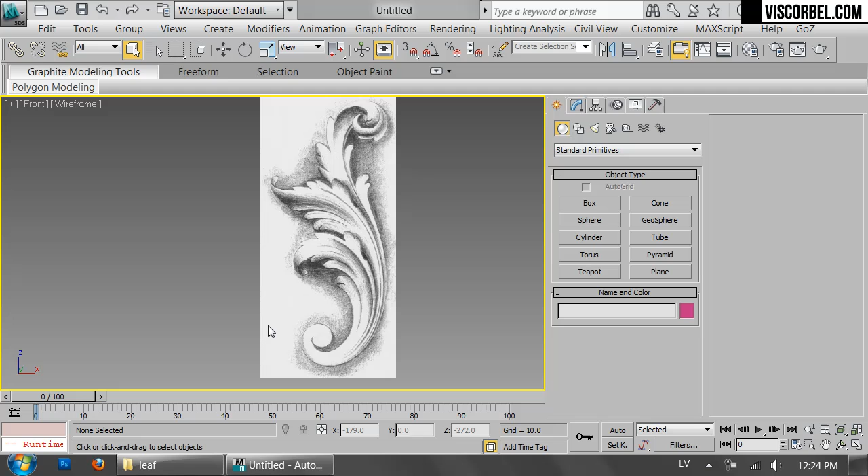Let's model some basic leaves. I'm gonna start with this little thing over here, just to show you the general idea.

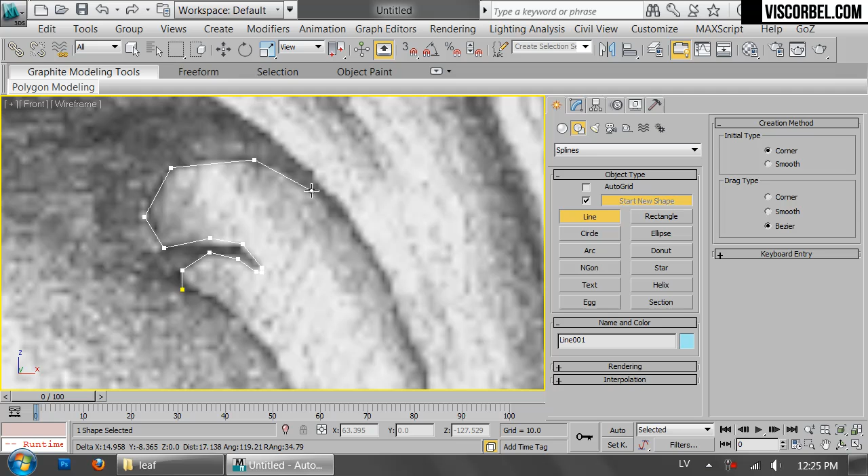So what you want to do is trace the outline of the leaf with the line tool. Just trace it roughly like this, since the overall shape will be smoothed by the TurboSmooth modifier.

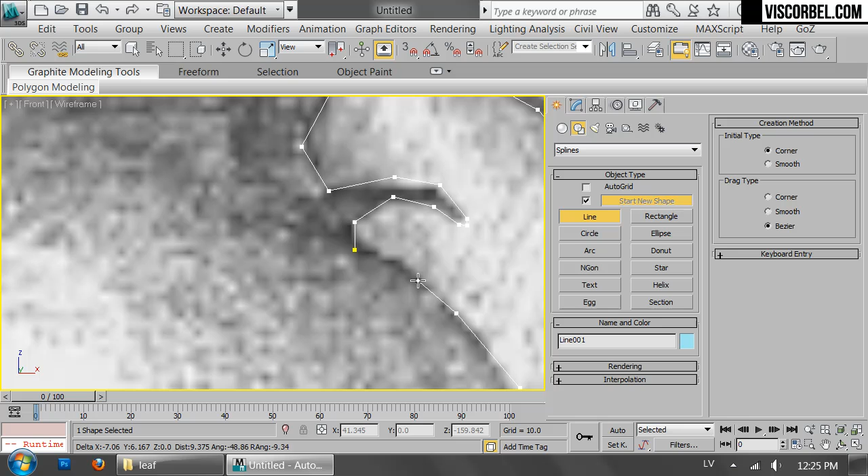When tracing, try to keep the point count or vertex count similar on both sides of the object, so you can easily connect them afterwards. So let's say we have something like this, and now we want to make it into a 3D shape.

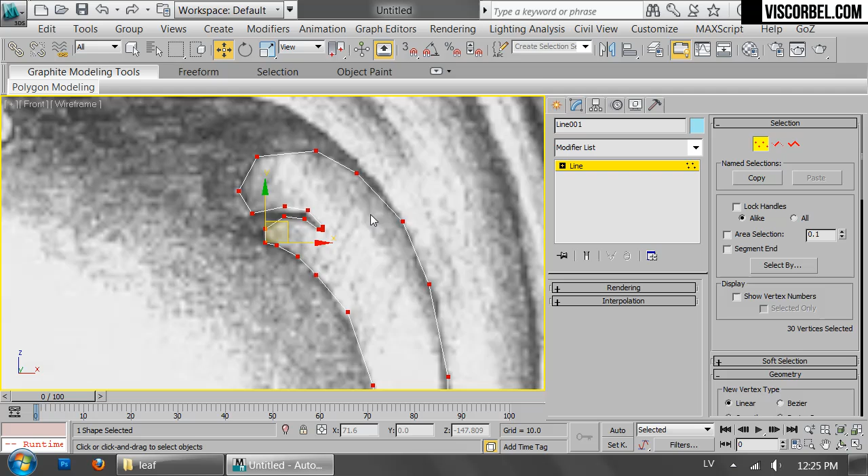To do that, first we have to check if all the vertices are set to corner type and collapse to editable poly. What we get is a flat piece of geometry with no edges in it, only the outside edges are there. The rest we need to cut in ourselves.

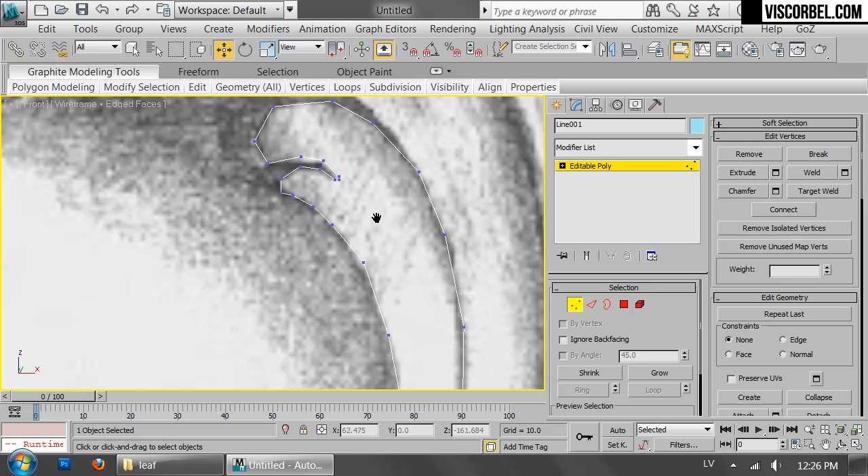Basically what I'm looking for is a nice grid, which can be achieved by using the cut tool, starting with the main lines of the object.

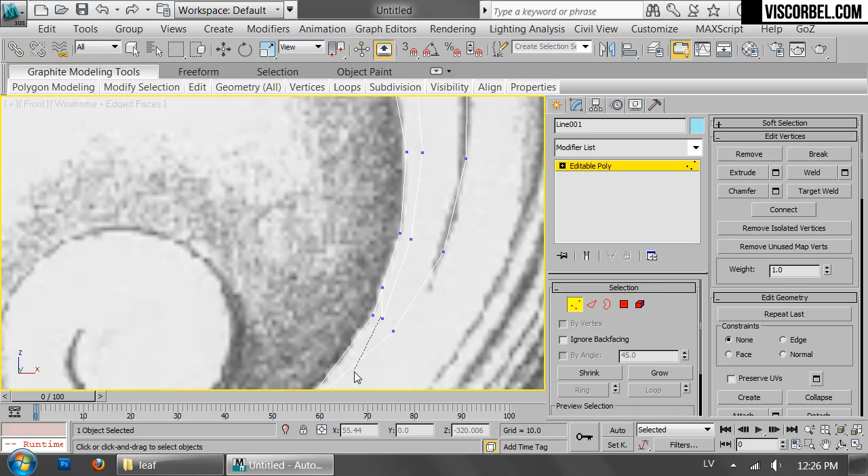You can also use the connect tool to connect the rest of the vertices. It's gonna be faster if you just use the keyboard shortcut, and you can set it up to whatever you want.

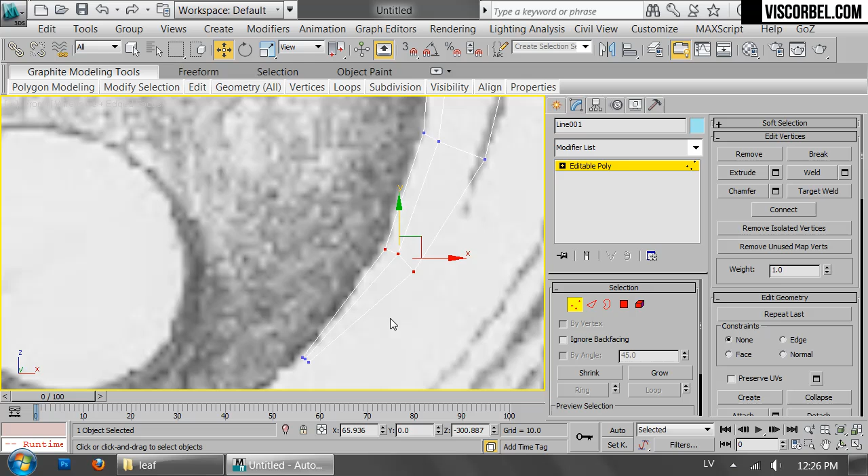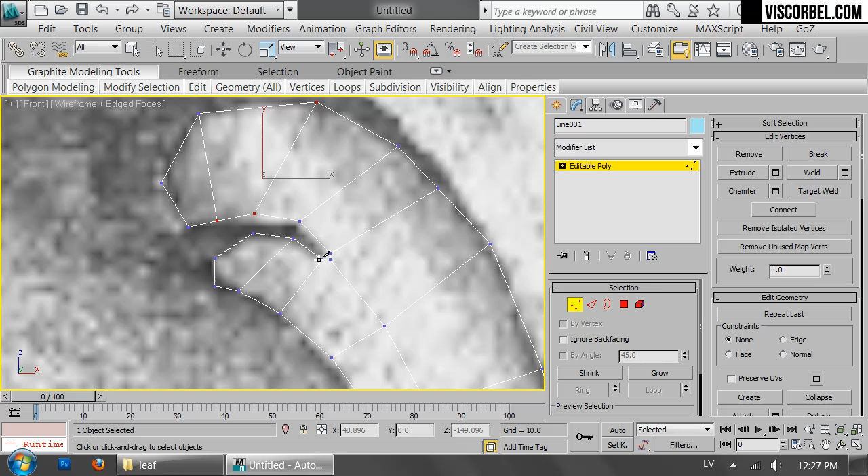As you can see, you can quickly go over it and cut in all these needed edges. My goal is to achieve a nice grid with all four-sided polys. If it's gonna take too much time, I'm not worried about making some triangles or pentagons as well.

So for example, here I'm gonna end with a triangle and cut on the other side of the edge. It's probably gonna be fine.

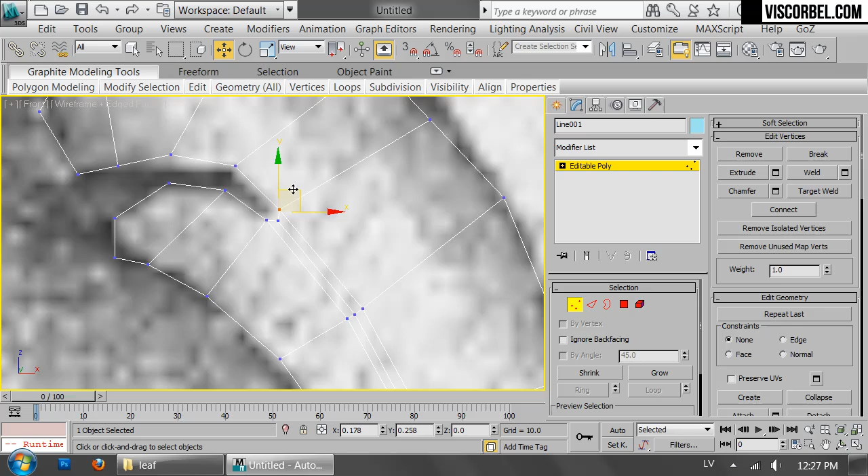I'm using some vertices close to each other over here, just to make a sharp corner there. I also want to add some edge loops in the middle of the leaf so I can give it a 3D shape by bringing those vertices outwards.

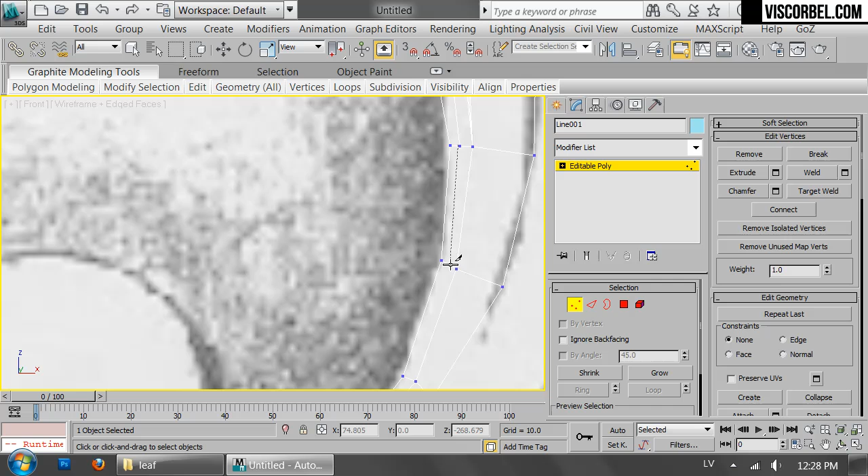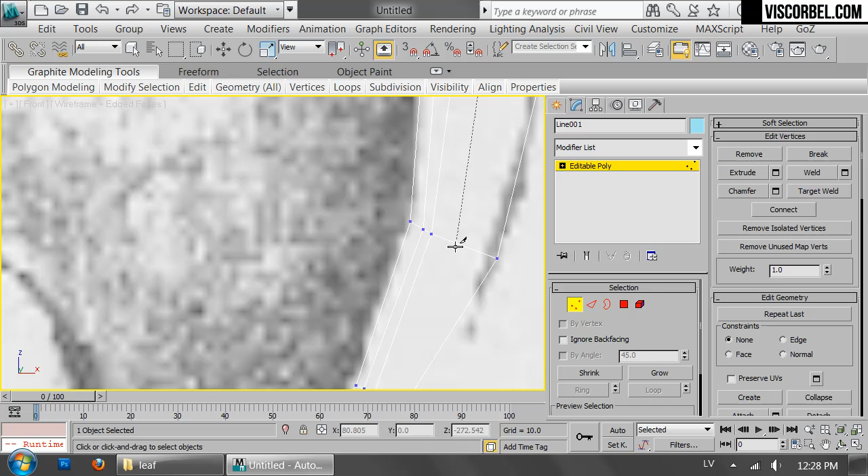Same here. And that's pretty much going to be all the detail we need for this particular object.

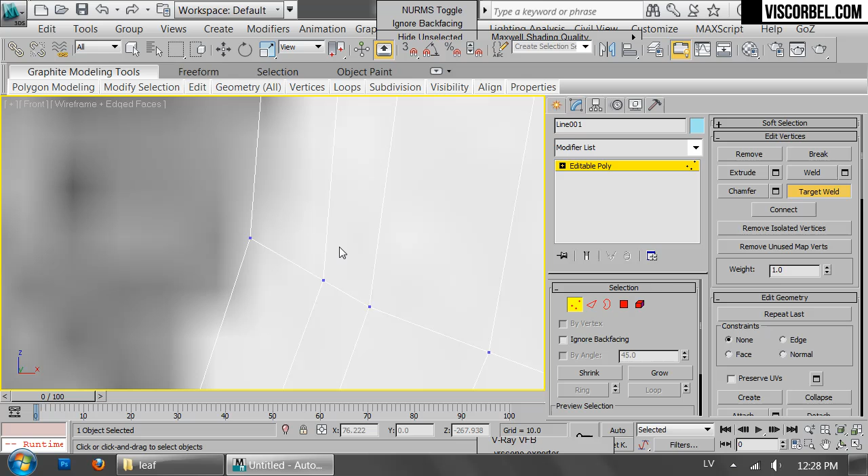Make sure no vertices are connected only by two edges. They have to have at least 3 edges coming out of them, except for these outer corners, which can have 2. All the inner vertices should have at least 3 edges coming out from them.

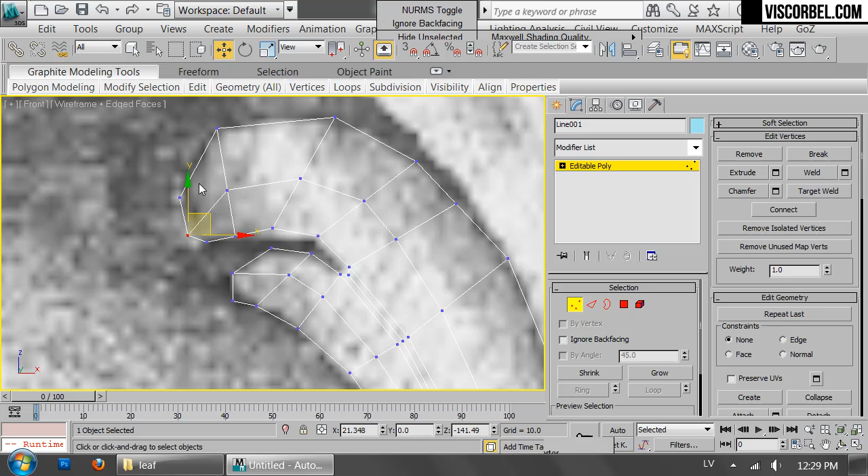Make sure the shape is nice and smooth. Let's add the TurboSmooth modifier to check the shape.

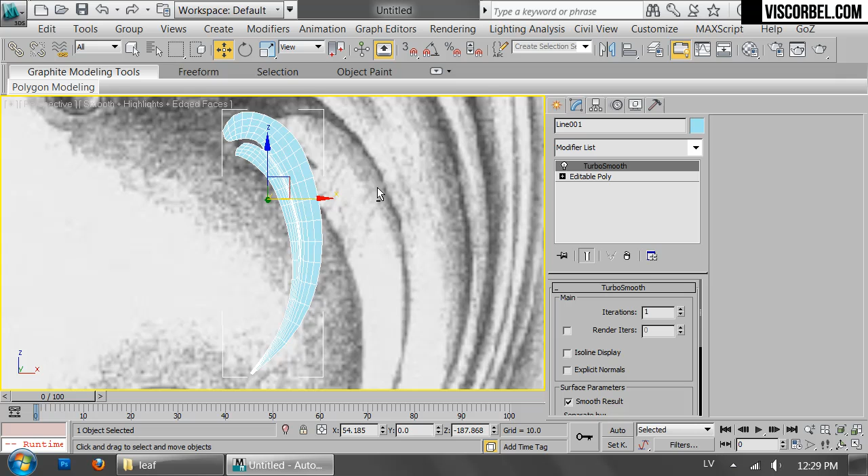You can fine-tune the vertex positions by turning on the preview and moving them until you get a perfect rounded shape.

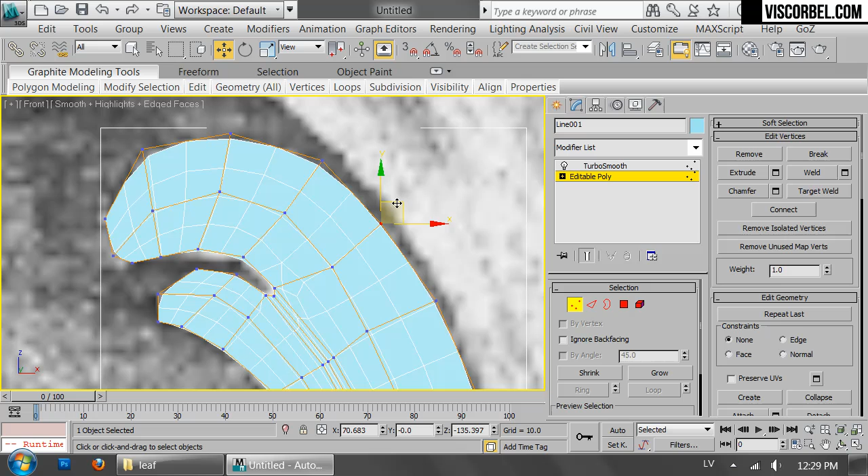So I think that's nice. Maybe let's taper the bottom a bit more, make it a bit thinner. Okay, and that's nice.

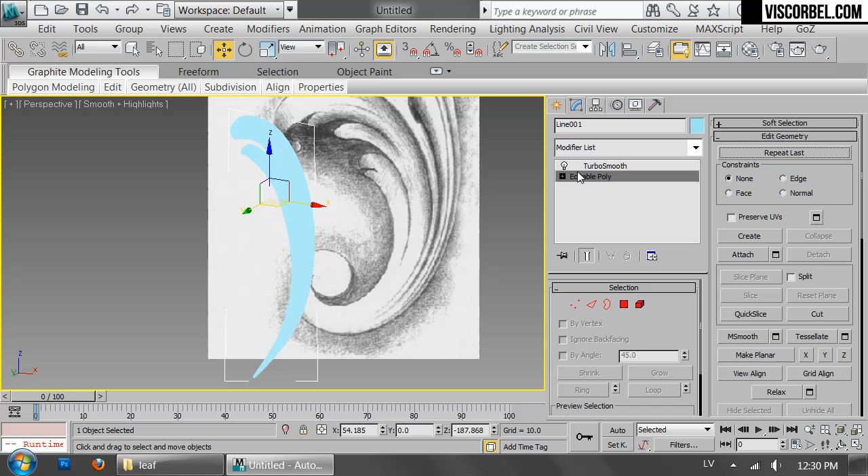Now we have to make the thing 3D. So what I'm gonna do is select some of my edges. Let's make a crease here by moving these edges inwards.

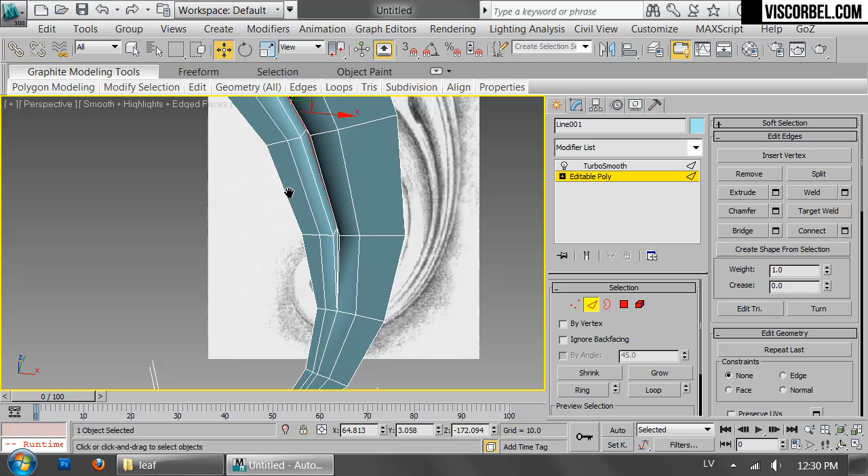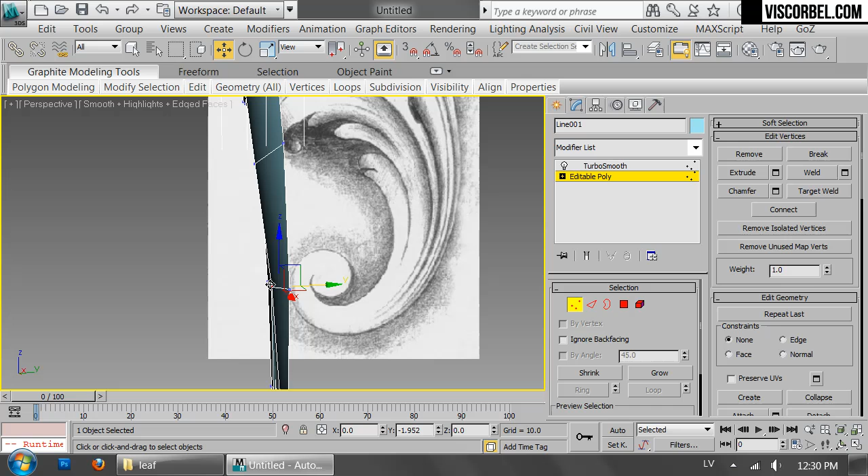Alright, like that. Then I'm gonna move these edges out. Nice. And move these edges out as well.

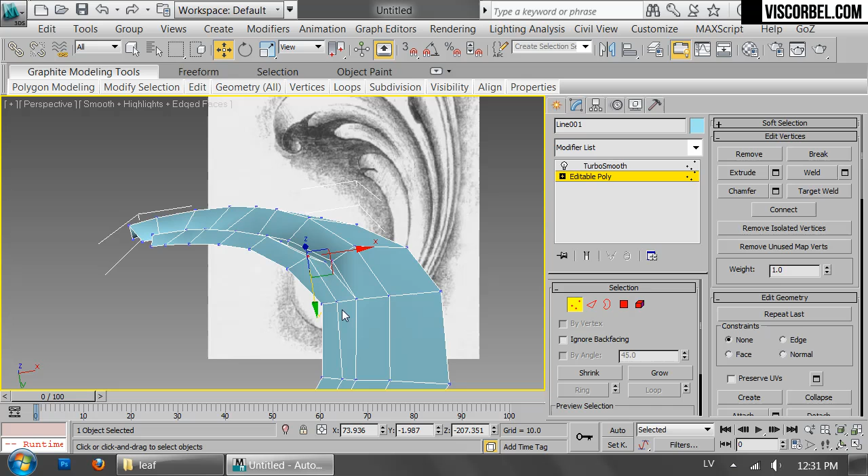Just try to make a nice three-dimensional shape for the leaf.

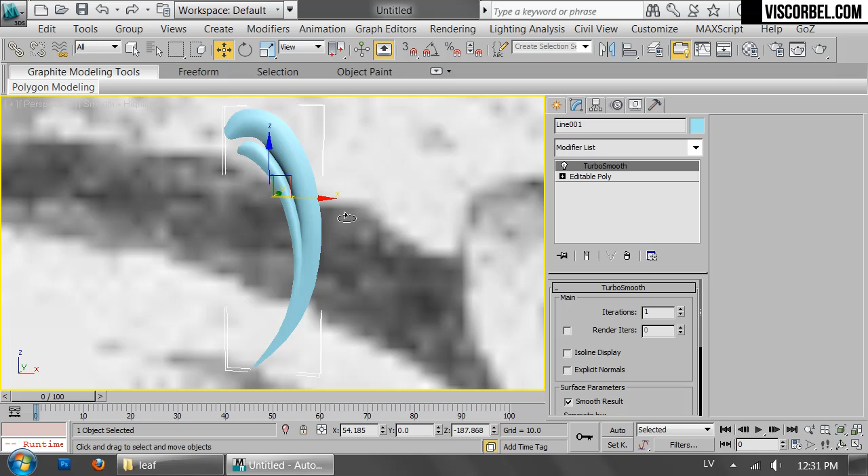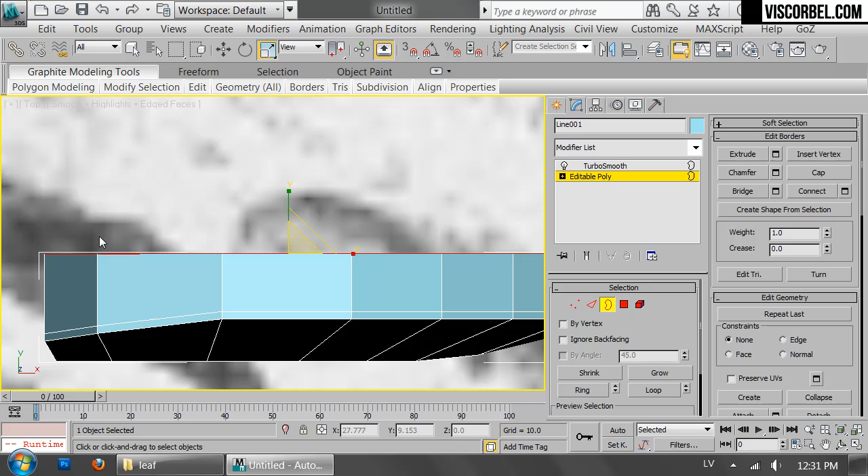Once you've done that, you can select the outline and Shift plus move it from the top view a couple of times to extrude it like this. Finally scale it down the y-axis, or you can right click on the scale button here and right click on the y-axis little arrow over here, and it's gonna flatten this outline, make it completely planar.

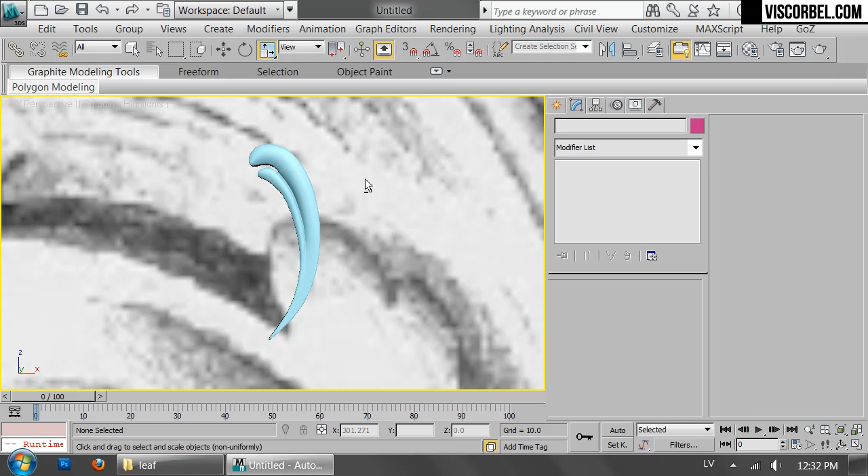And that's a very basic, very simple leaf you have there.

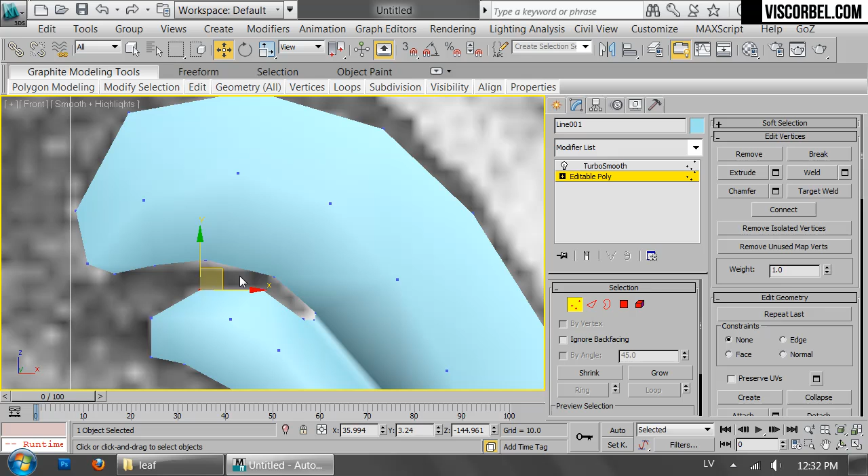This is the same technique I'm gonna use for all the more complicated versions or examples. The basic idea is gonna be just the same.

If you don't like these open faces on the bottom, I mean on the back, you can just add a cap holes modifier above the Turbo Smooth, and it closes it up nicely like this.

So that's the general idea on how to make some simple leaves, and you can use the same techniques for more complicated examples as well.

If you want to make the shape a bit more interesting, you can add an edit poly above the editable poly, just to make sure you don't mess up the original.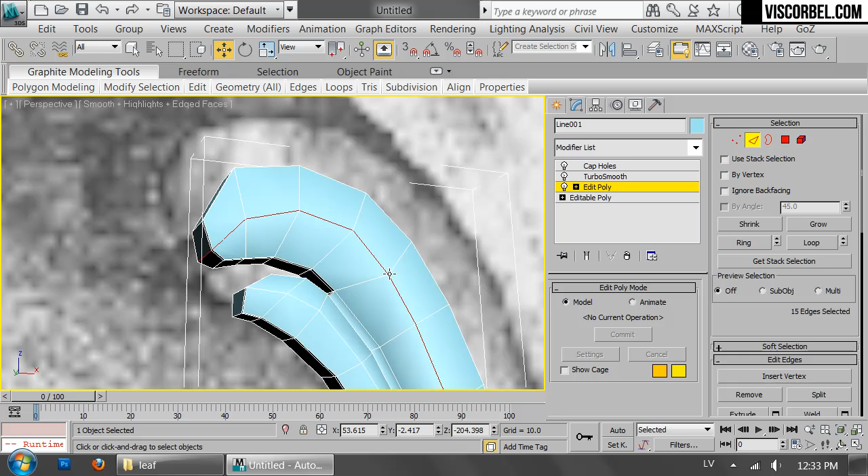Maybe I'm going to select the edge loop, make a crease here by chamfering it. Right, and maybe let's adjust it a bit further.

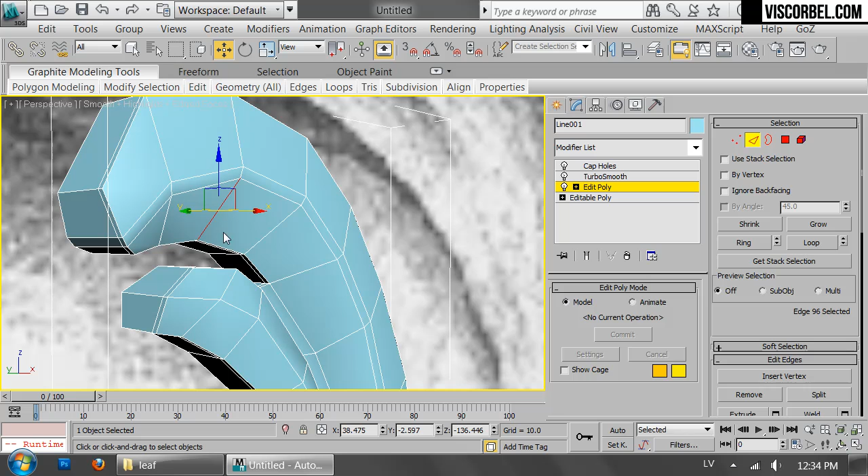Let's say I want to make this part a bit rounded towards the inside. So select the edge ring, and use the flow connect to make a nice smooth connection.

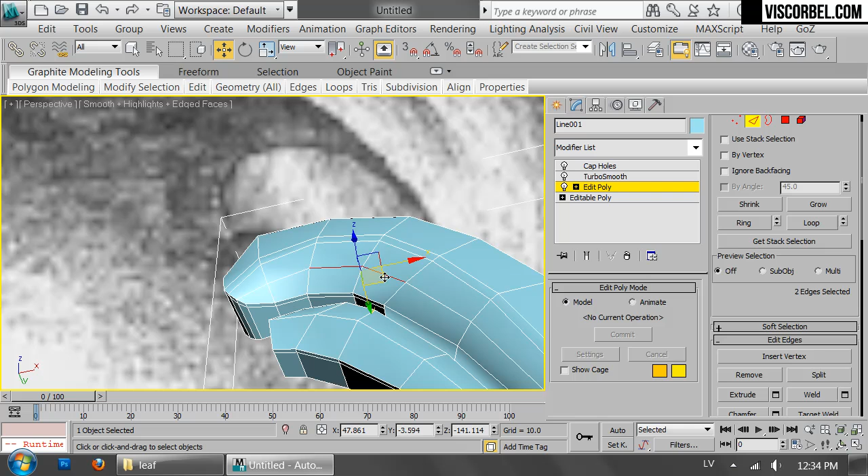And finally select some of these edges and move them inwards. And the shape is a bit more interesting now.

Maybe let's fine-tune this part.

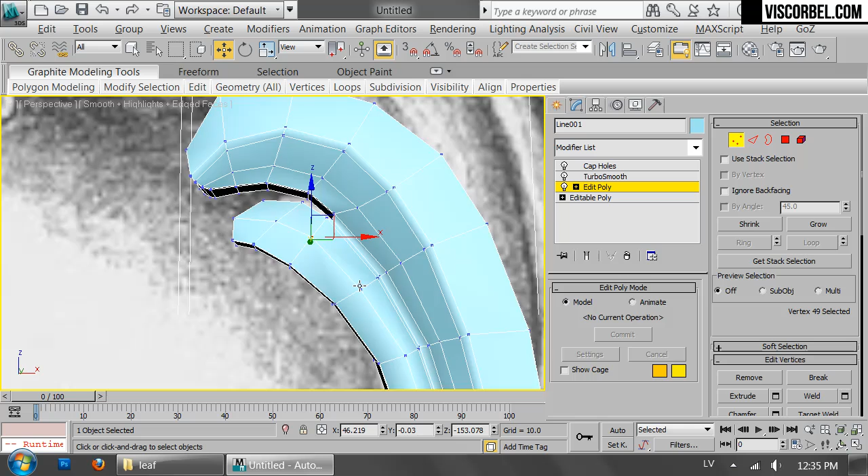Alright, so it's a bit different from our reference photo or the reference drawing. I think it looks a bit nicer this way.